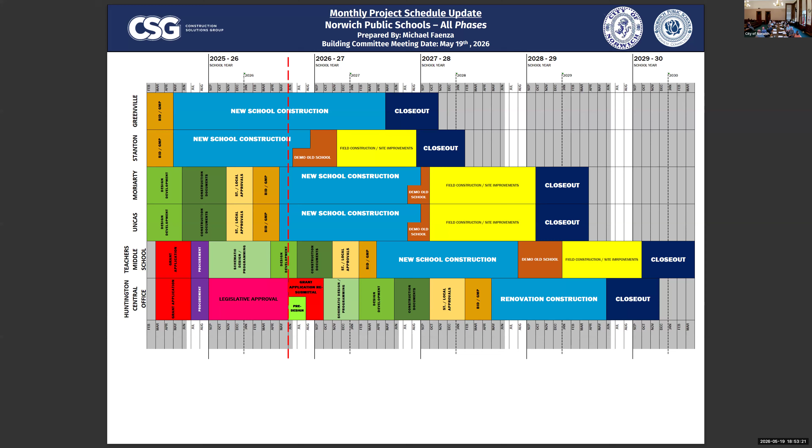All right, anything else there, Mike? No. All right, that was good, at least for this part anyway.

Just before you go up, so you were looking at starting to demo Stanton in August. Barring issues, the demo of Stanton would actually begin in the middle of June, because based on the way this chart is shown, it would be right after the end of school. As soon as school ends, we'll vacate anything that needs to be salvaged from that building, meaning the teachers' belongings. We've already arranged a temporary storage location at Teachers Middle School for the gap period if needed. If the new Stanton building's ready, we'll bring the stuff right from old Stanton into new Stanton to be stored for the summer.

But in order to keep the project on Downes' construction schedule, our effort will be to get that building emptied out of anything that needs to be salvaged as quickly as humanly possible, then get going on the demo. So you might find yourself in a situation where you're putting the last finishing touch on the new building and emptying out and getting ready to demo the existing building at the same time.

Oh, the new building won't be finished before we pull all the stuff out of it. That was my next question. Yeah, it'll finish in time for the opening of the school year, but in order to stay on schedule, we would need to empty that building and turn it over to Downes for demolition while the other building is getting the finishing touches, as it were. Wow. Any other questions?

All right, good evening everybody. Happy first day of summer. We're going to report out on phase 1, phase 2, and phase 3, starting with phase 1, Greeneville and Stanton.

Go to the next slide, our construction administration activities. Key activities for Stanton beyond the weekly site visits, field reports, that type of thing. Submittals, specialty ceilings, emergency door decal numbering, toilet and dressing compartments were submittals looked at for Stanton recently, and in Greeneville similar activities, but then in terms of key submittals, area D, which is the gymnasium up at the upper level, steel erection drawings, millwork shop drawings, FRP panel drawings, and then area D concrete rebar. So those are some of the things.

In recent reports out to you, I was highlighting DRA's weekly architects field reports, but today I'm highlighting CES as our mechanical engineer. So they've been going through the building as well, able to do reports for us and identify areas for fix or conformance, that type of thing. So just a sample of that. And then site observation notes from SLR.

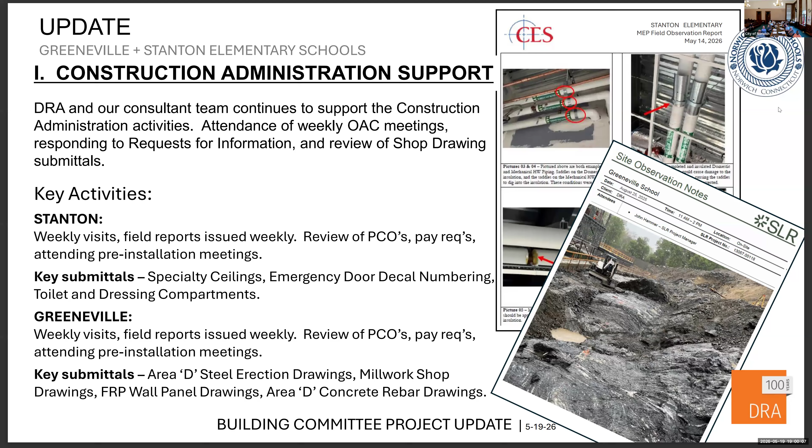This happens to be at the Greeneville site. This is an area directly behind the kindergarten wing and some of the ledge that's outside of that as it transitions up the hill. So if you go to the next slide, please. And by the way, I mentioned SLR, John Hammer is here this evening, is interested in this. John's been very active throughout this.

That transition, if you'll recall, when we first looked at it, you come into the Golden Street entrance, there's a lower plateau, there's an upper plateau, and the area that we were interested in was that transition. How do you get up the approximately 28 feet? This was a diagram that we shared with you probably now two years ago, where we looked at the stacking of the building as an academic organization and then across a bridge to that gymnasium, to that upper tier.

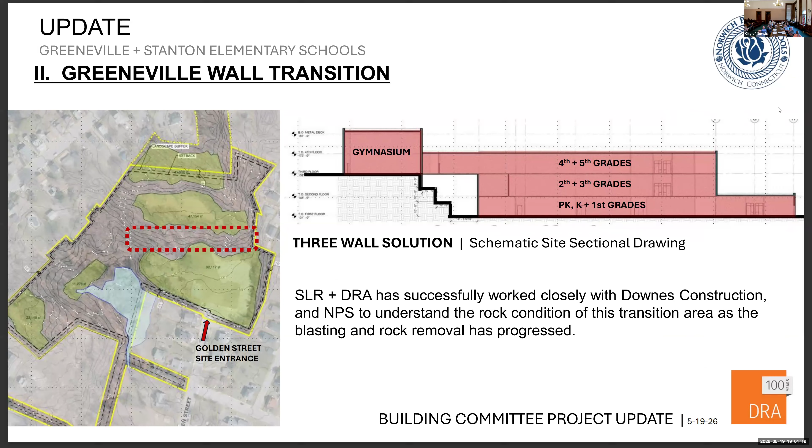If you go to the next slide, this is a drawing that John and his team put together. We initially envisioned 3 equal steps moving, to make that transition up the 28 feet.

If you go to the next slide, this is an actual plan that John's team did at SLR, looking at those 3 walls that we were considering, 4A, 4B, 4C, 4A being at the top, and then down to 4C, which is down at the grade level. As we're looking at it, the consideration was, might we be able to get rid of wall 4B?

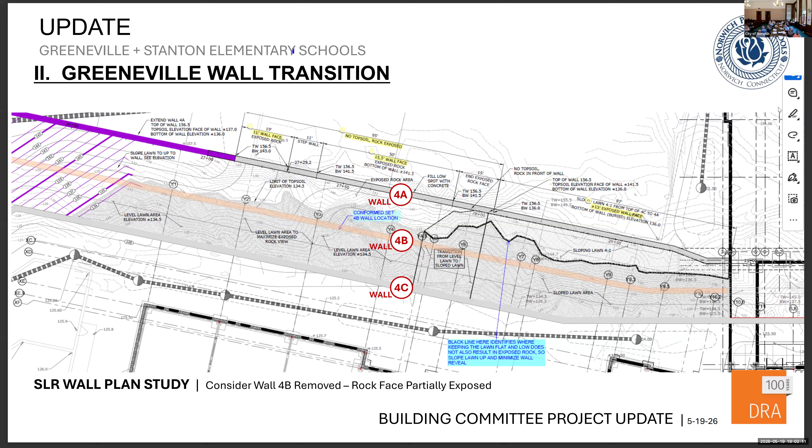And that's what this study is all about. There's some advantage in it. By not having a step there, it allows this to slope back at a lesser rate. It opens up more volume of light, et cetera. So we think it helps in terms of as it sits next to the skin of the building down in this area. You go to the next slide.

This is kind of a rendering of that, again by John's team. We'll call them visualizations.

So as you're looking at it, the gym is the brick wall off to the side, and that's where the connector comes across and makes connection. The upper railing abutting this is the playground area. These are 6-foot high chain link fencing across the entirety of it. When you get out to the basketball court area, it's up to 10 feet high. Our typical walls are set with a 4-foot high guardrail along them.

But what this was doing was exploring the rock that does expose itself and come out, expressing it as something that rather than cover it and try to build a wall over it, allow it to remain and to then naturally seed and get some growth in those areas that doesn't have the exposed rock.

We have a couple wall studies down here, just giving you a sense, looking straight at it, one down the skin of that wall system with that layering. We do have a row of trees planted in front of it.

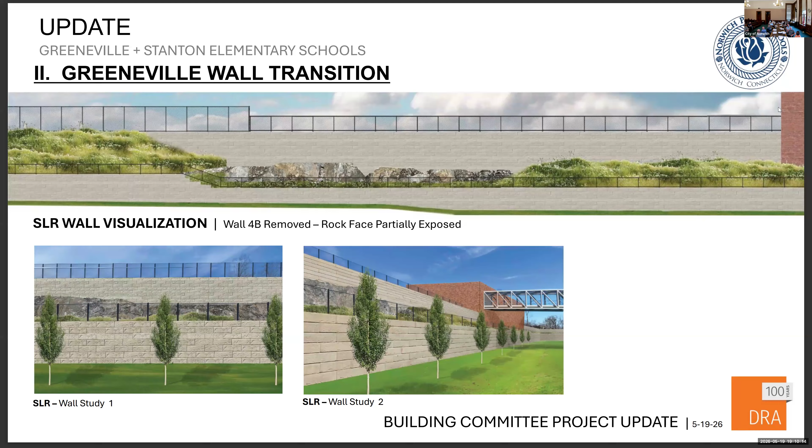Next, so another item that we have been working through: electronic monumental signs. This was an add alternate that ultimately was accepted. We began to move it through.

So they are the size that you bought in the alternate, and they are in phase 2, they'll be in phase 3. And we got them approved both single-sided as at Greeneville and double-sided as at Stanton. So we have all the flexibility. And when we take phase 3 through, we will, as we did last time, show the sign, and now we can reference the approval.

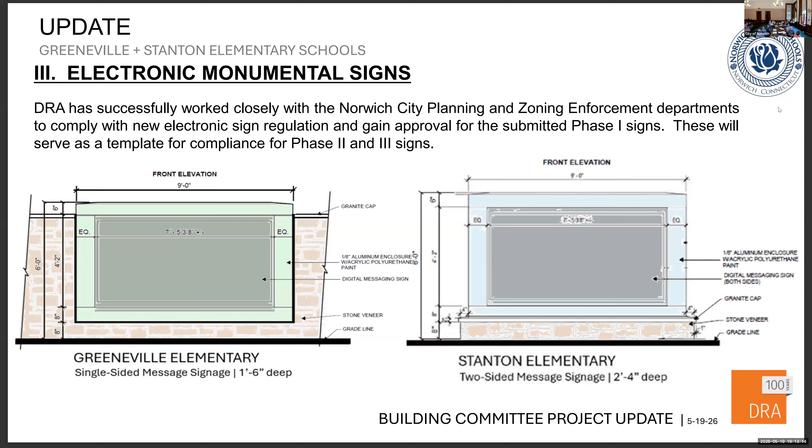As long as it's part of a continuous wall as opposed to just a separate element, I think we got all the flexibility we need. And when you're done with these 6 schools, I don't know that you'll ever revisit this, because I can't imagine another town building that would have a need for a sign like this. So it's kind of set the standard with the schools, move through them all, knowing that's the most of those.

Police department. Oh, is it a police department? Yeah, that could be one.

All right, next. So FF&E and technology for Stanton, as Mike had said before, we're down to a couple of items, trying to buy everything we can without bidding it, and we've managed to exceed it. We have about $3,600 left to go: classroom flags, some OTPT parts. I think we have OTPT under control now. Classroom flags, we were trying to make sure they were USA made, and that's more difficult than it might seem, especially for flags.

We are probably at the next meeting going to set up a timeline for Greenville, so you can start anticipating when we'll have that package in front of you for your approval, so we get it from the state for review. We want to try to set that purchase somewhere around October or mid to late October to get that purchase done, because price increases are typically in January.

Well, it's not the typical price increase, it's when the regional buying consortium contracts change before the pricing changes. So we want to get that because everyone's going to be anticipating pricing changes. We work with the vendors, work with our largest vendors, and ask them when would be most advantageous for the city to purchase. Right now we're being told get it into October, and that gets you past the holiday lull that foreign manufacturers of some equipment take, and the domestic manufacturers go into a stasis between Thanksgiving and the end of the year. So October gives everyone a good time to load all that in.

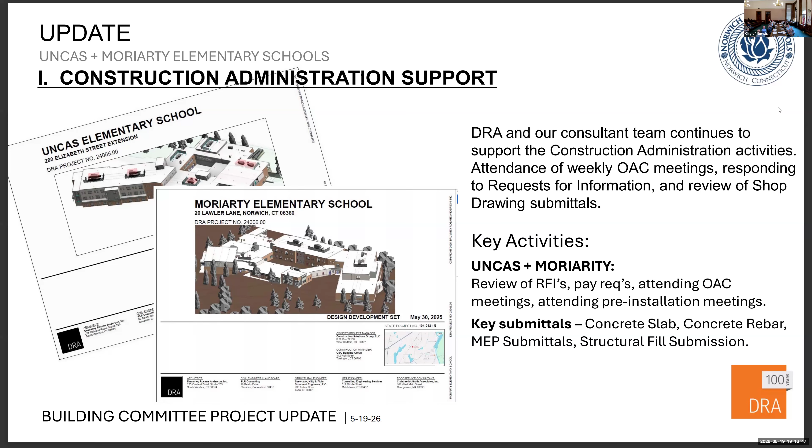Next slide. Relative to the schedule overall, we delivered the schematic design end of March. April, May, and June were dedicated to DD. As Mike identified in his report, we have a lot of work on our plate trying to get this thing right-sized. We're about at the midpoint here of the DD delivery.

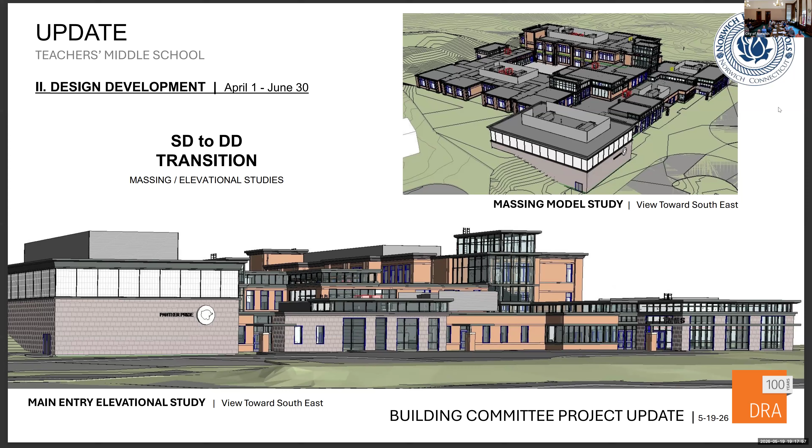So we're moving through that. And if you move to the next slide, it is this transition - we shared this slide last time - and it's how do we move forward from SD into DD? Really, we have to get the overall program statement solidified, nailed down, and agreed upon so that we can move forward without having to make adjustments to the plan. We have ideas, we're on our way there and working hard with the entire team, O&G, CSG, all of our consultants and our team internally.

Which part of acreage, the back, up in the park or in the front? So I guess you're referring to the back, the eastern side. Not the upper, but on the other side. If you're looking out the main entrance to the school, look straight up. Okay, if you could stay there.

Teachers, Huntington, like we said, we're canvassing with Dan's group and our consultants. We are using the documents we put together early in the programming effort to give everybody an idea of what might happen, because that includes Transition Academy and adult learning. We're asking everybody in this building, primarily the front part, the old part of the building, what would you want to know about what's inside the building that may involve opening the wall or ceiling or testing, so we can get it done this summer, patch it back up, and have it ready for use in September. Then I'll set some time up with Mike to talk about what the programming might be, Richard.

There's some floor tiles there. Yeah, floor tile I think is pretty easy. Matt Brown's going to send us the asbestos reports. The real consideration with that building is if the walls are terracotta behind the plaster, or if the plaster itself is asbestos containing. I don't think the plaster will be, but I'm sure the tiles are. Given the age of the building, I'm kind of concerned that all the walls are terracotta.

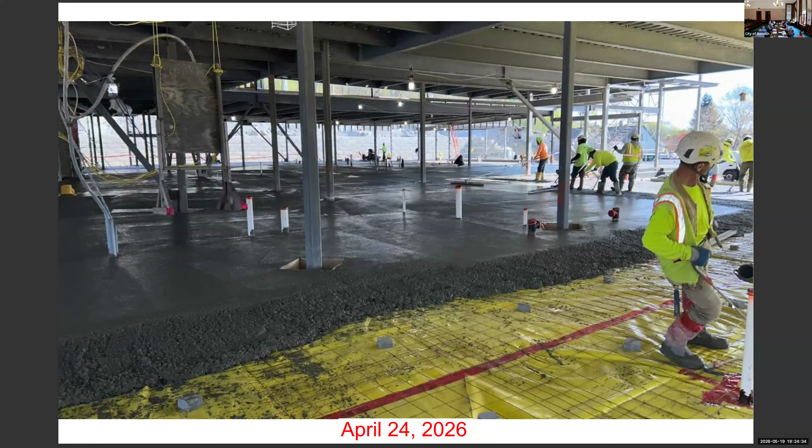First one here, this is the slab on grade in area A and B. This was April 24th, just after our meeting last time.

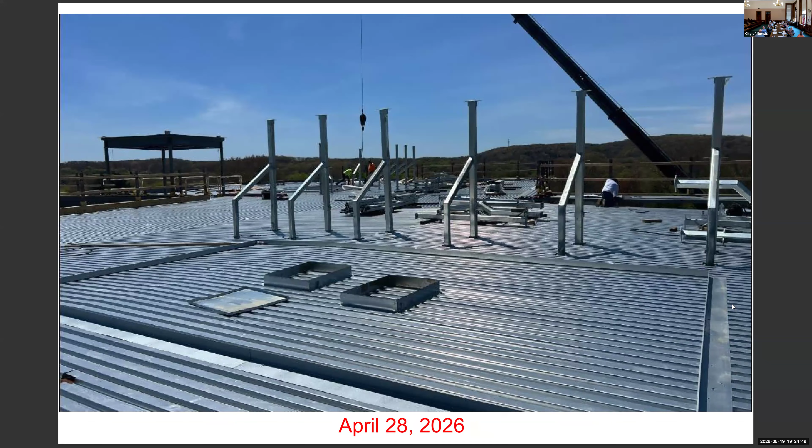This is some of the roof screen support steel getting craned up to the roof. Here's the pour stop layout for a mechanical pad that gets poured in concrete. The interior duct penetrations there will get cut out after the unit's in place. That concrete has since been poured.

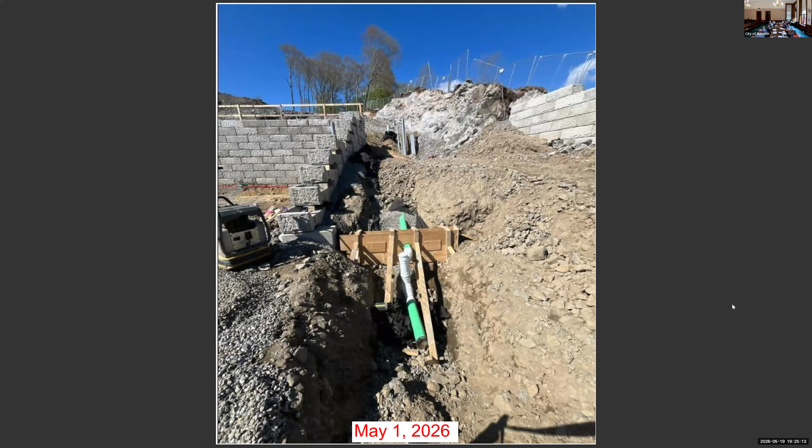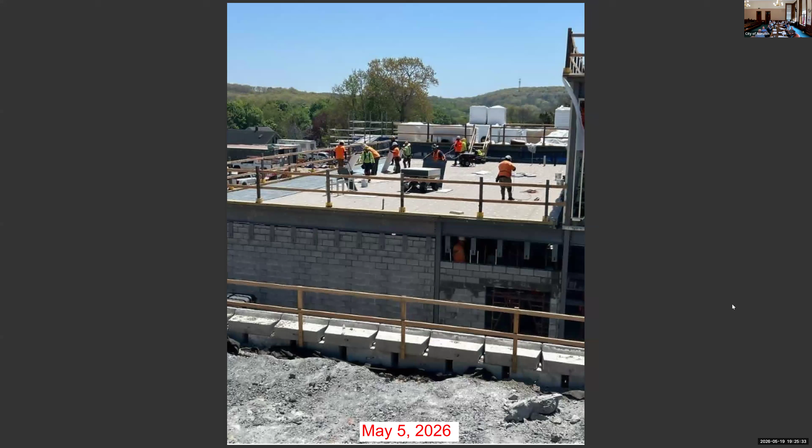This is that utility corridor that goes up. So we're at the lower level of the site here, just off to the right-hand side of your loading dock. You have the sanitary sewer line getting installed there and some electrical conduits - if you can see them at the top, they're poking through there. We have a delivery of that conduit on site, so we're going to start installing that, making our way up to Boswell.

Roof installation ongoing, this is area A - that same mechanical wing I just talked about. You can see a lot more block work in place, but roof install is early May.

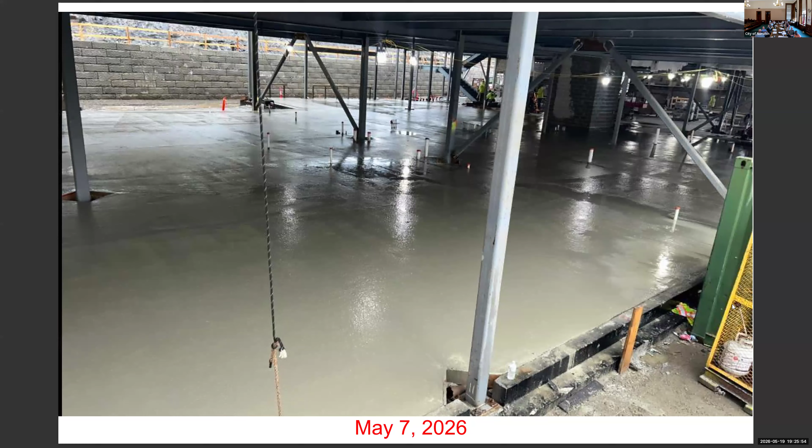This is the slab on grade in area C. We had to do two different pours due to the volume of that slab. This was May 7th, so now the entire slab on grade is complete.

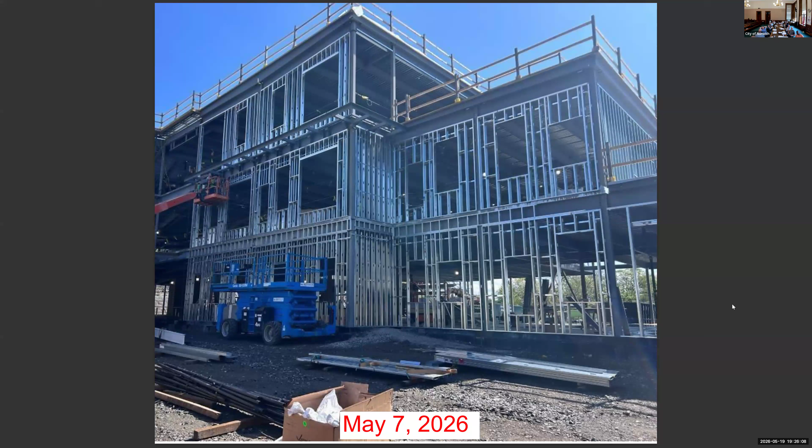You saw exterior framing - this is it. Your main entry is right over here on the left-hand side, area B, going out to the right-hand side of that photo. A lot of progress on exterior framing here.

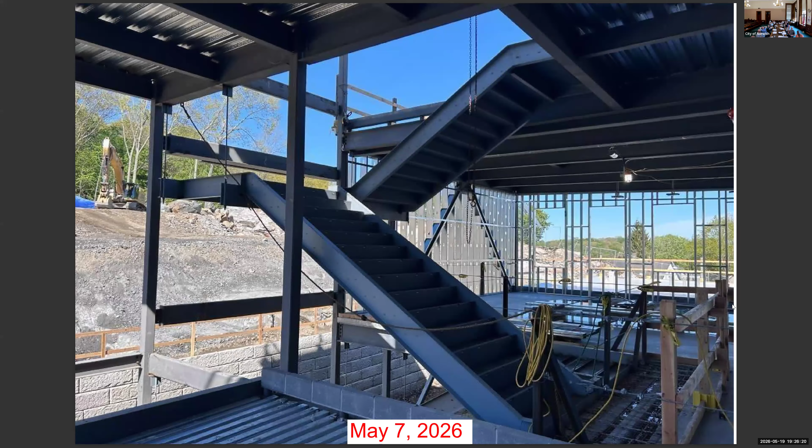Here's that stair 4 I was talking about. Rails aren't installed in this photo, but this is in the middle of installation.

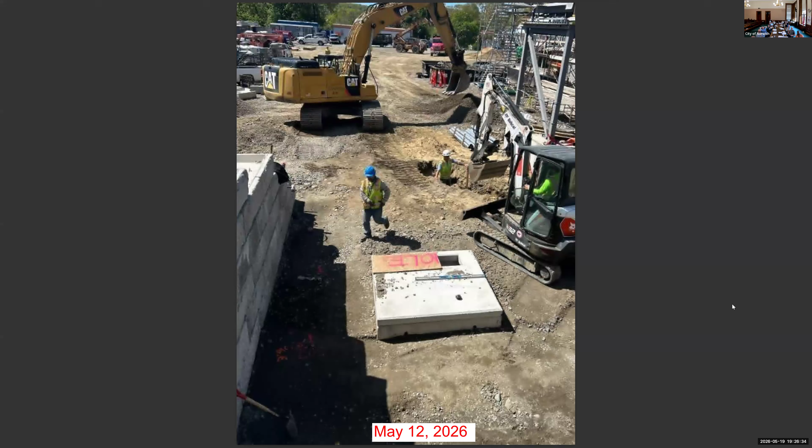There's one of those concrete pads I was talking about, getting finished right there on May 12th.

Do you know what the rise and run of those stairs are? I was curious - I don't think the photo you saw had handrails in place yet. I'm not sure, but it's your standard stair, whatever that is. Do you know what that is, Jim? Rise run for the stairwells there?

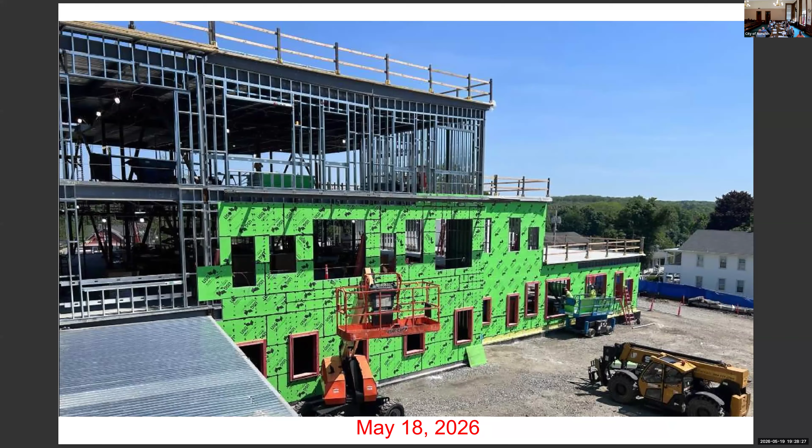This is that same side you just saw with the framing, from a bit of a different angle, but now we have sheathing ongoing and window blocking. The AVB, the air vapor barrier, masonry, is going to follow behind that.

That would be for the gym - a footing for a column that goes up. That wall gets up to 10 to 14 feet in different areas, depending on the footing level. It ain't gonna move - it gets pinned to the rock there too on that south face, doweled right into it.

So that's our photos. Any questions on progress or photos? We'll jump into the rest of it.

The sewage, you're gonna have to pump it up the hill? No, that actually comes down from D and goes out Golden Street, downhill from up top, so it's all gravity fed. Downhill is good, yeah.

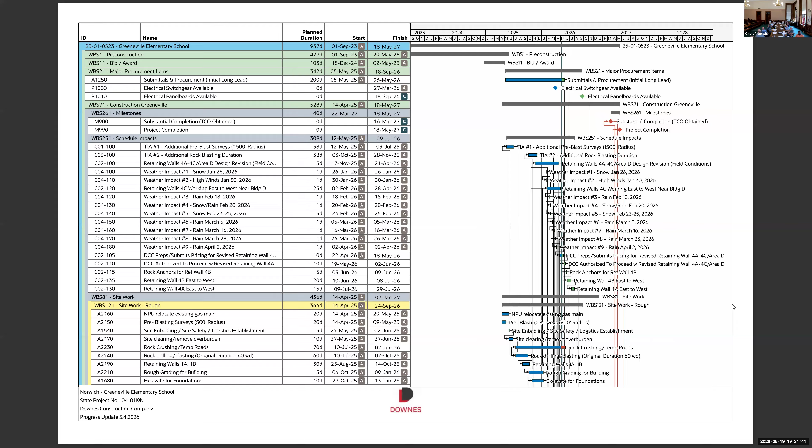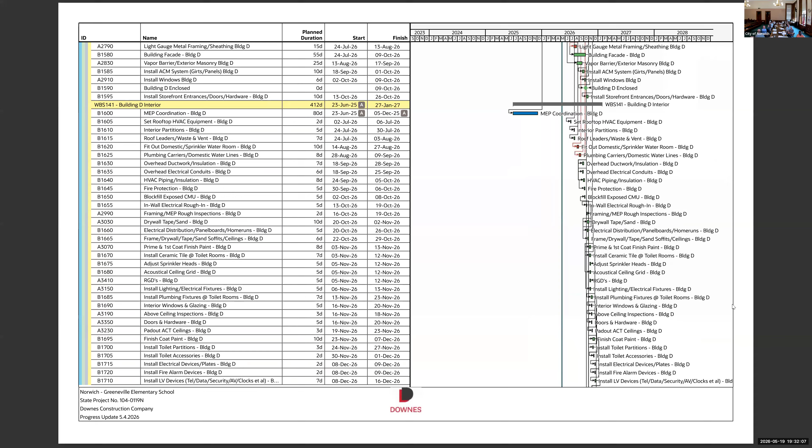So how much rock work do we have still for the drive from Boswell into the parking area, the upper parking? There's still a little bit of work up at Boswell, right at the entrance. There's some work for the city that has to come in to improve sight lines after we're completed. But we've taken a substantial amount of that rock out. There's still a little bit left - we have to get into the street to take that out. But that's where the whole utility corridor comes up to, so that's all been blasted. It's just a matter of removing that material.

What was at Boswell was not blasted because of the proximity to gas lines and stuff in the street, so that's all been hammered down over the last 2 to 3 weeks. We're still working with rock up there, but we've made substantial progress. So your incline is good right now? We don't have the incline into the site yet, or the decline if you will, from Boswell, but all that material is in progress of being handled and taken off site, getting us down to grade.

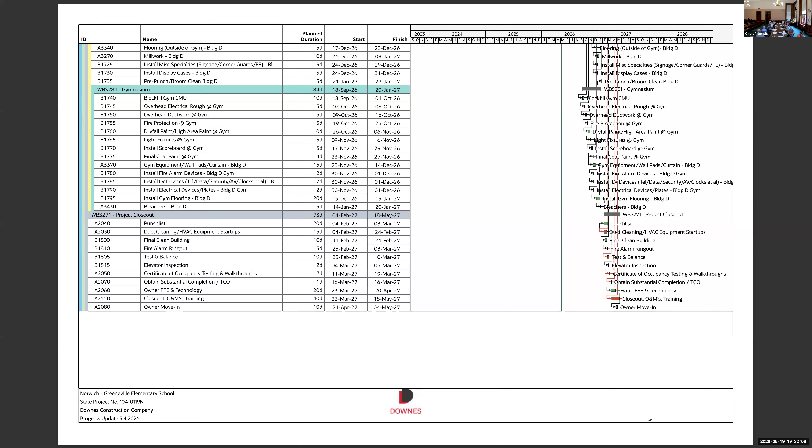Anything, any other questions on Greeneville? Thank you. There are none. All right.

This worked out good.

I'll run you through some photos to help you visualize where we're at. I'll mention we did do a tour at Stanton the other day, some of you might have seen the article in the paper. Went pretty well, I thought the article was solid and complimentary to the project. The pictures of me were terrible, but other than that it was fine.

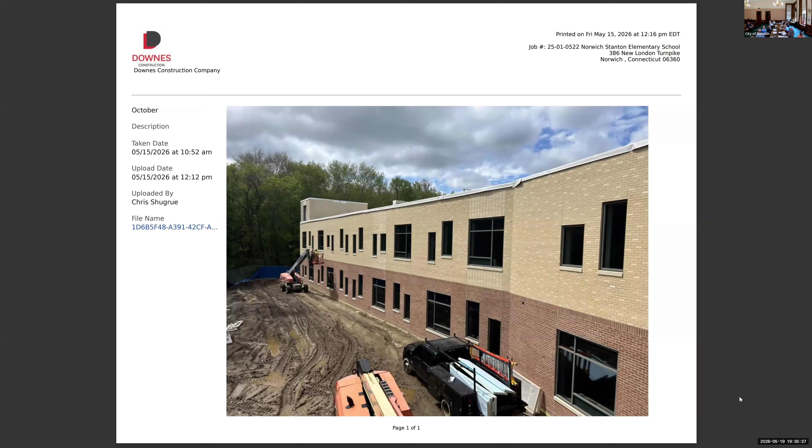So the east elevation, I've been showing this photo for the last several months: framed, sheathed, masonry veneer, and now the windows and storefronts are completed. That's east elevation A and B. And then the opposite side, west elevation A and B, windows installed.

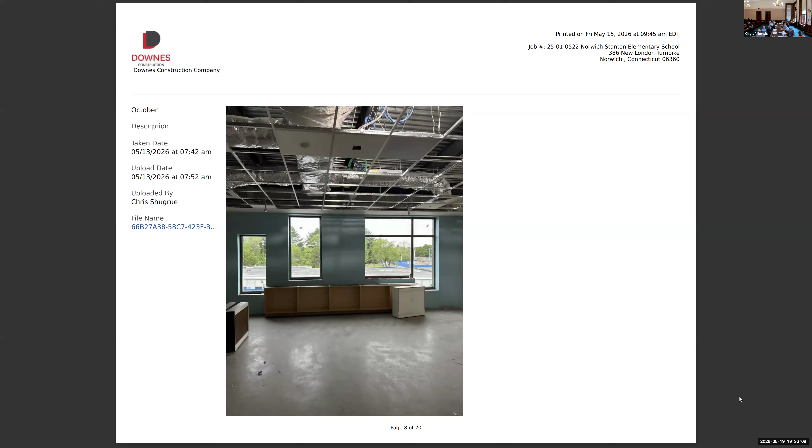Typical classroom on building A, second floor. That's the millwork wall. All casework on the second floor is delivered and just about installed. Countertops are coming at the end of this week. And on the opposite side of that wall is the exterior window wall, where there's an open shelving unit that goes in from window to window.

Typical classroom flooring arrangement, there's two colors: a wave pattern that they're using a template to cut, and 12 by 12 squares, confetti, a little color splashed across the floor. So second floor resilient flooring is being installed.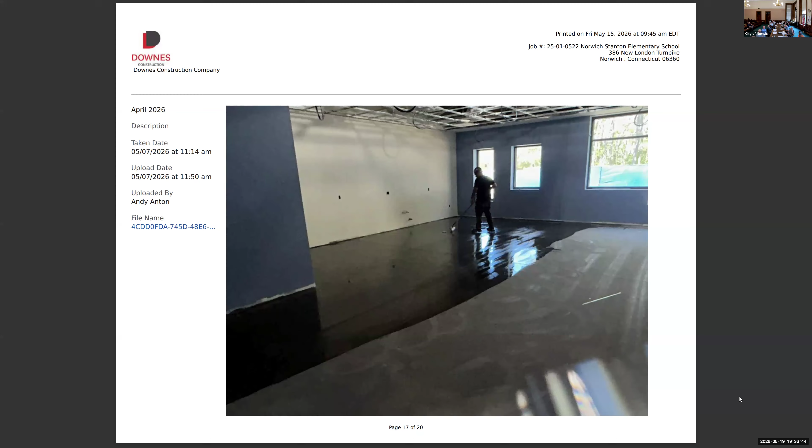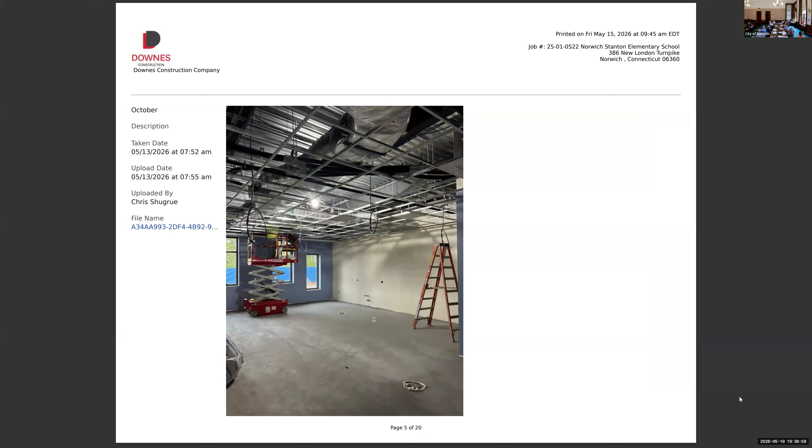On the ground floor, we're prepping all the floors. All slab on grade receives a moisture mitigation system, which is what they're doing there, installing that moisture mitigation. In the next photo, the floor's been prepped, they floated it out. That room is the kindergarten wing. Millwork just got delivered this week, floors are prepped, walls got a couple coats of paint, and we're finishing the ceiling. So we're turning that over to millwork now.

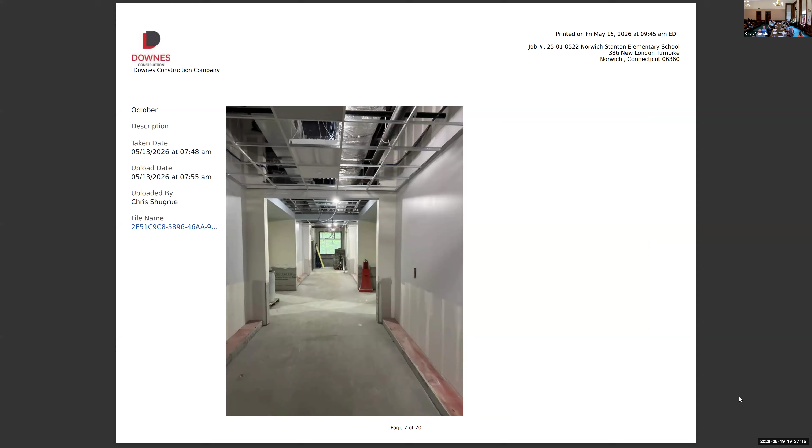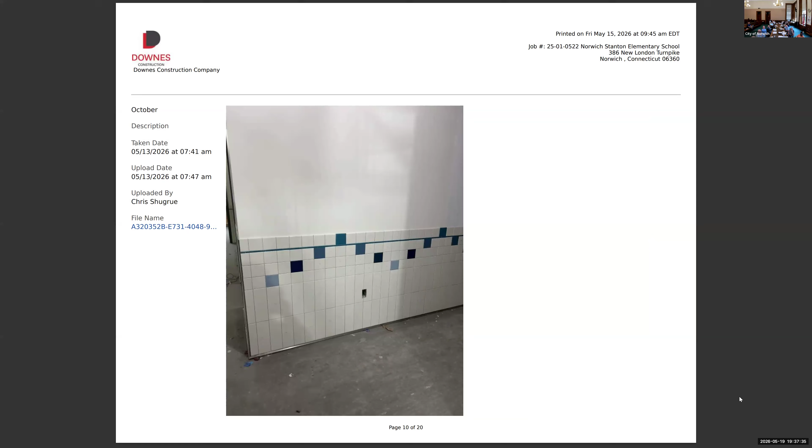A is done, B is in progress. That's the multi-gang toilet room, boys and girls room on the second floor. Second floor ceramic tile is complete, floors and walls, and they're in progress on the mirror image toilet rooms on the first floor.

That is just inside the gym entry. That's display cases, built into recessed display cases, with a drywall wavy soffit.

Complete the drywall. The floor in there will be wood, a wood floor sleeper system. It's not removable, it's for life. Just another photo of the gym.

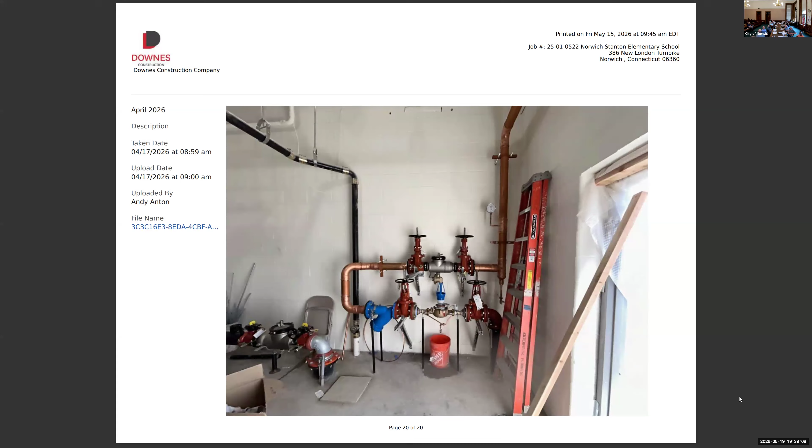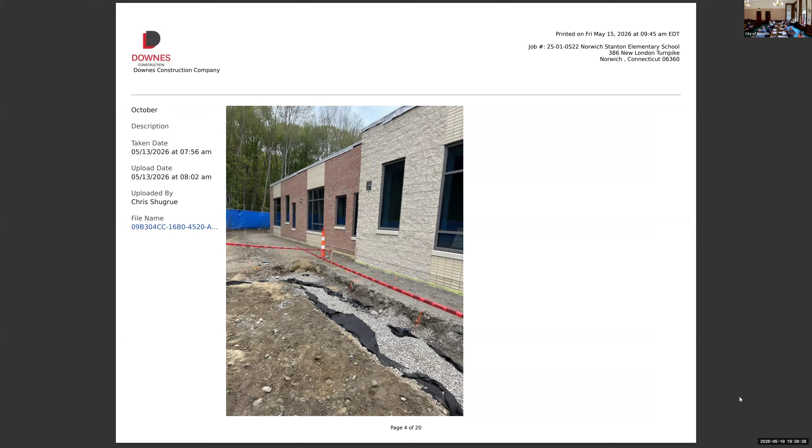Domestic water service is complete, we have water in the building, which is nice. Fire service is complete also. We're fitting out the boiler room now. The site contractor is just outside the kindergarten pre-K classroom wing, getting started with prepping sidewalks and the playground in that area. That'll be completed with this phase as well, along with the adjacent playground.

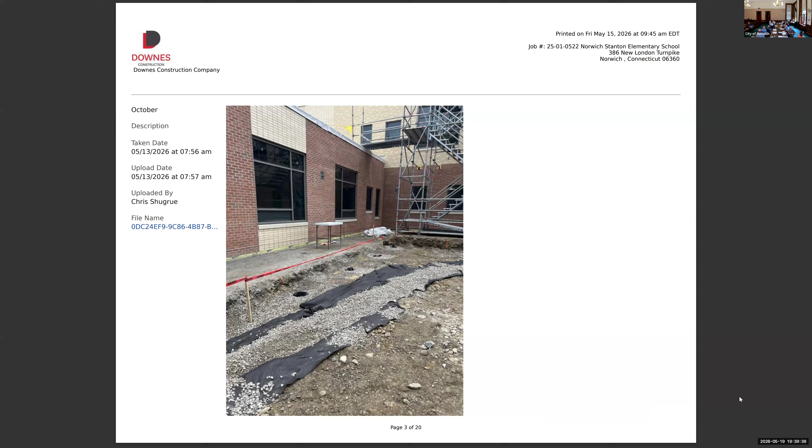Is it a dry sprinkler system right now? In the building? Yeah, no, wet sprinkler. Okay, no dry.

Subcontractor allowances are still preserved. There's a few pending out there, but we've done pretty well with our allowances, using them sparingly. Similarly with the construction manager allowances, there's still a balance remaining. And uniquely on this project, the project contingency has actually grown and gotten larger instead of shrinking.

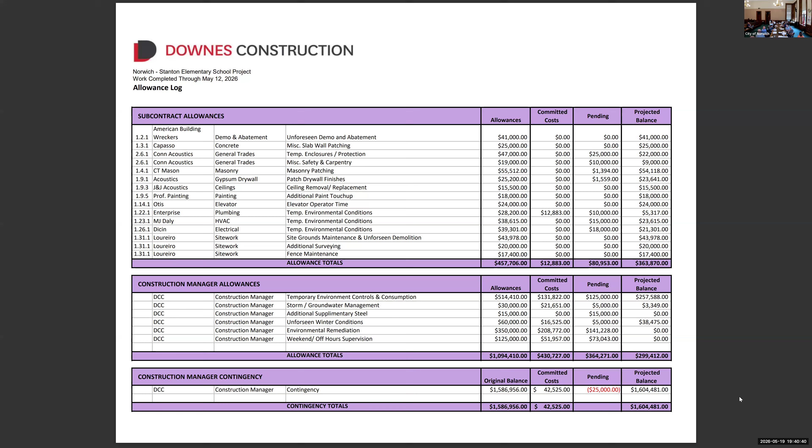All right. Where are we at? That's the other memo for phase two, Mark. Yeah, I know, I just turned up here. Where are we at, phase one projects? All right, so we got that. Items impacting project costs, phase one. Which one do we have? That's phase two. Is that the other one? Phase one. There we go. I'll read these and then just allow the respective Downes and ERA staff to address these.

So the first group are to be paid from owner contingency, direct contract costs. We've got Stanton PCO 70R1 for some added sinks at toilet room C109 and C110. Jim, give the rationale behind it. The sink count was necessary to bring it up for purposes of meeting the point for loading in the area.

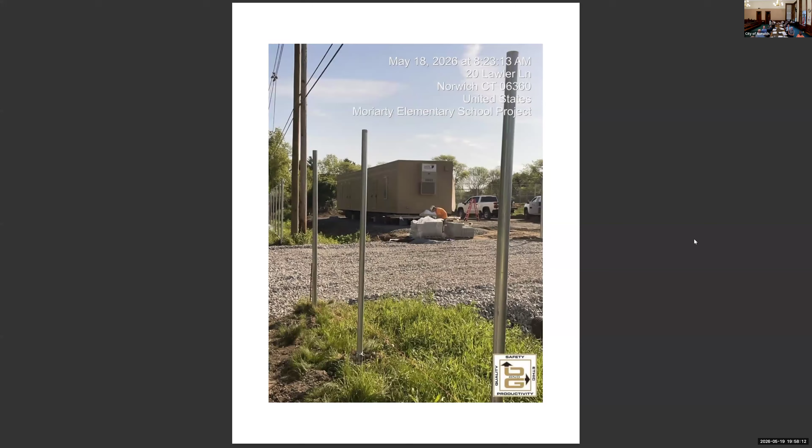So we are along Canterbury Turnpike here, showing some progress of our trailer that got delivered last week. It's actually all set up now as of today, all skirted, locked, and leveled. Looking to get power set up next and then internet the following week.

More pictures here of some fencing behind the existing school, just separating construction and student population areas. I'm going to shrink our footprint here. Uncas, we can go right into the pictures, the next slide here.

Mobilized site work contractor on the 7th of May, a little over two weeks ago, less than two weeks ago. The screen doesn't do any of the tree clearing any justice, but there's about 2.5 more weeks of tree clearing on this property as there was on Moriarty.

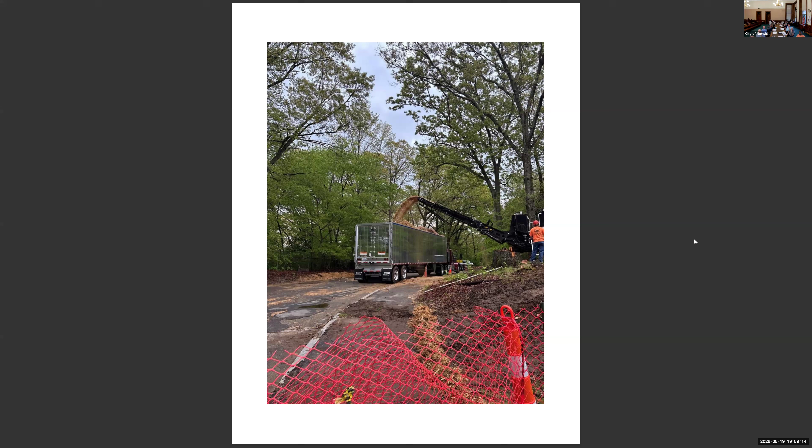This picture is actually in the temporary logging, chipping, laydown area. It's where our permanent trailer will be. We're chipping up the trees and hauling them out off of Allen Avenue. Next picture here is that process unfolding, chipping up the logs and grubbings and hauling the trailers out and off of Allen in the back there.

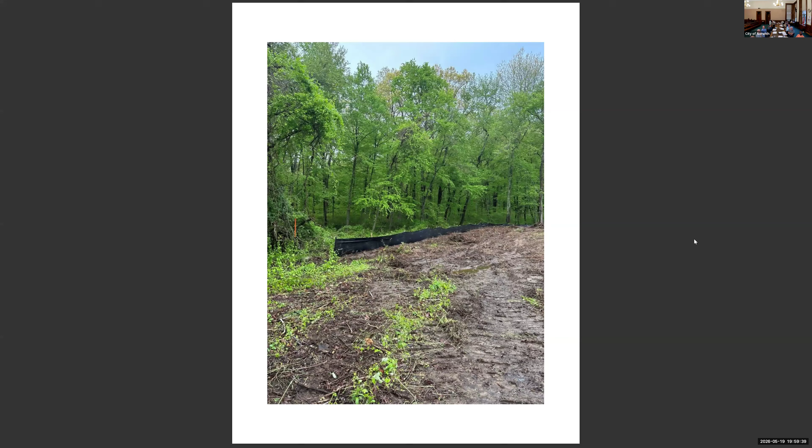This picture is looking down on the backside of the school, south side of the project. Temporary barriers here for now are set up to separate school population from construction activities. Ultimately there will be a hard temporary metal fence there. We've got to get some more trees out of the way in order to make that work.

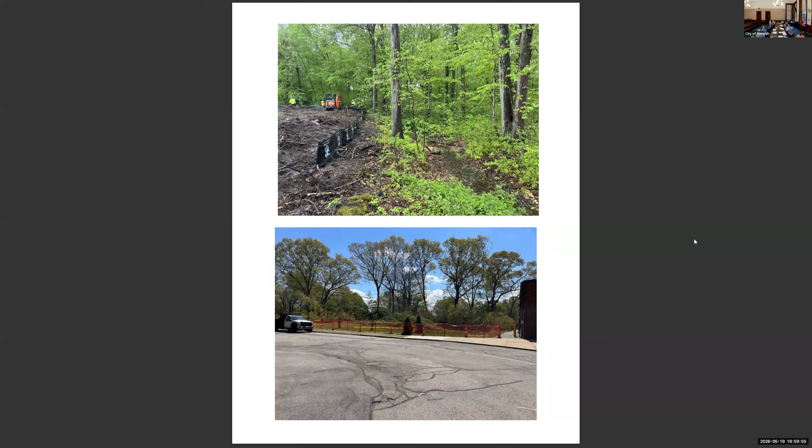Next couple pictures will show some erosion control set up on the boundaries of the site limits. Again, more E&S up at the top there, and then the front of Uncas Elementary School here. This ultimately will become a lawn play area when the kids return in August, but right now it's cautioned off because this is where we're hauling all the trees from the back of the site all the way out to the front, our east access road I believe.

Decided to show a picture of this unhealthy tree that we had taken down. There's a lot of that going on here, but excited to plant some new trees for many years to come.

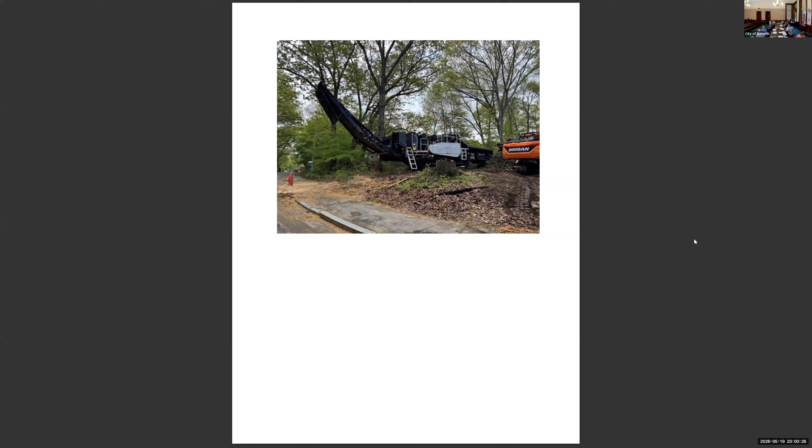More separation between school population and construction activities, along with some more E&S at the bottom there. Finally, just some more pictures of some tree clearing equipment that I wanted to show.

Thank you. Yeah, I actually was on property this afternoon as well. Probably 95% of the trees have been felled. All of the chip material has been off-hauled. Looks quite different. You now know where your property limits are. It's quite a lot of trees removed.

Okay, so on the pre-construction side of things, what has been going on over the last month? I think 31 scope reviews since our last meeting. That was 20 days, so 20 days, 31 90-minute meetings. That represents a total of 56 scope reviews done so far for the project. Did have to scope review a couple of the trades more than once to finalize a couple things, and I'll get into the detail of that.

I reported here that I was actually complete with all the scope reviews, which I had hoped to be, but I have two left. I have to do fire stopping - number two, number one didn't have scope - and final cleaning. So, getting very close to the end of that. As Mike mentioned, my ability to wrap up the GMP has been impacted by the duration of time I needed for all of these scope reviews and nailing down contracts with these trades.

Other than that, I updated the pre-construction schedule. Not much left to the pre-construction schedule. I guess I should just run down what these other activities were. So upcoming for me is to produce the GMP amendment, as Mike mentioned. I have a target of Thursday to get my draft to Mike, and then we'll circulate it around and be in a position to bring it to this committee at the next meeting. I'm now in contract mode, so moving from scope reviews into contracts.

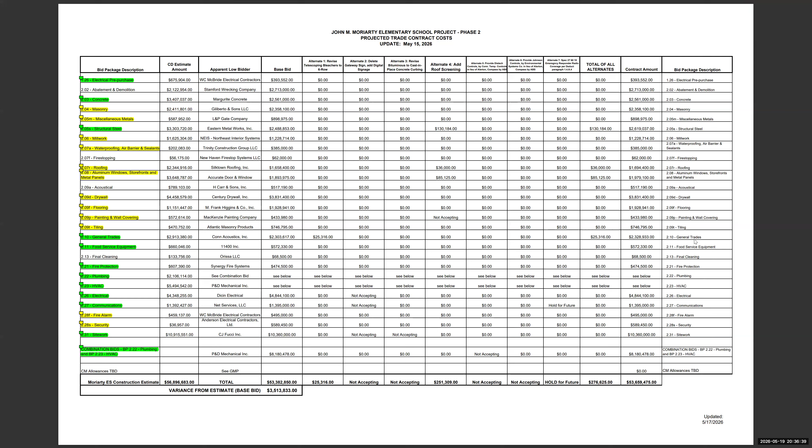Any other discussion? Hearing none. Roll call vote: Greg Velocity, yes. Mark Kulos, yes. Cindy, yes. Bill, yes. Joe, yes. Sheila, yes. Pete, yeah. Peter, yes. Zato, yes. Myself, yes. 10-0, all right.

All right, there are two PCOs up for consideration, the same PCO for both. It's for adding breakers to the main distribution panel, and EDP, it's an electrical sub-panel. And the rationale for this was when the bid packages went out to the bidding contractors, old information was provided that wasn't updated with current breakers.

This is unbought scope from the bid period, and this is exactly why we have a contingency. The one for Moriarty was in the amount of $1,276, again being paid out of the CM construction contingency on the phase one GMP. And for Uncas, the value is $9,677, again paid out of the phase one GMP for the early electrical procurement package.